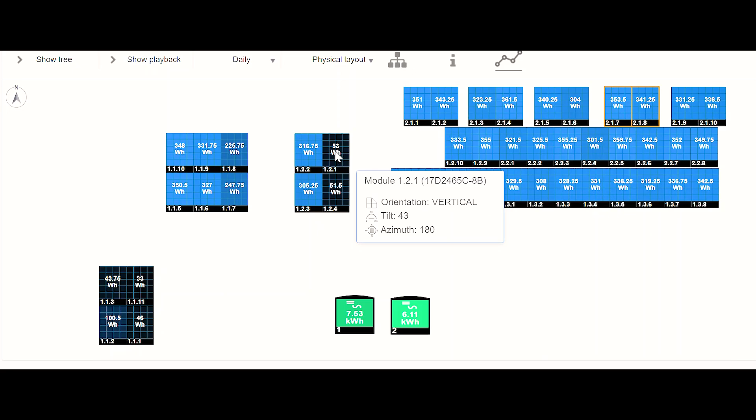The way my solar panels were stacked with the inverter, the production will still be maximized. These ones that are west-facing and will produce lower during the day are stacked over some other ones I'll be showing you when you look at the logical layout. You get what I mean?

So looking at the logical layout, I have 2 inverters. This is the bigger one, inverter 1, with a capacity of 10 kilowatts per hour, while this one has a capacity of 7.5. You can see this one is already at 6.11.

This one isn't stacked too much because all the solar panels connected to this inverter are all working, all on the highest part of the roof, so they're working well. To minimize the impact of clipping, the stacking ratio here is lower, so you can see it's at 6.11, whereas this one has more panels.

This has 3 strings: string 1.1, string 1.2, string 1.3. It has more capacity, but you can see the 6 modules that are producing less - 1, 2, 3, 4, 5, 6. They're all stacked on strings 1 and 2 because they don't produce as much in the morning, so we can still maximize the conversion rate with the inverter.

So as the sun gets higher in the day, these ones will pick up more, and later in the day when the sun is about to set, you'll still be able to have a better bell curve. So the ones that don't produce as much throughout are stacked on this bigger one. This means I'm able to get up to that 10 kilowatt hour conversion continuously, because if these ones are already at their max, this group of 6 will still be chasing it until the sun gets to that peak time. And as the sun gets lower in the day in the west, this one will be producing at their maximum, because these are west-facing.

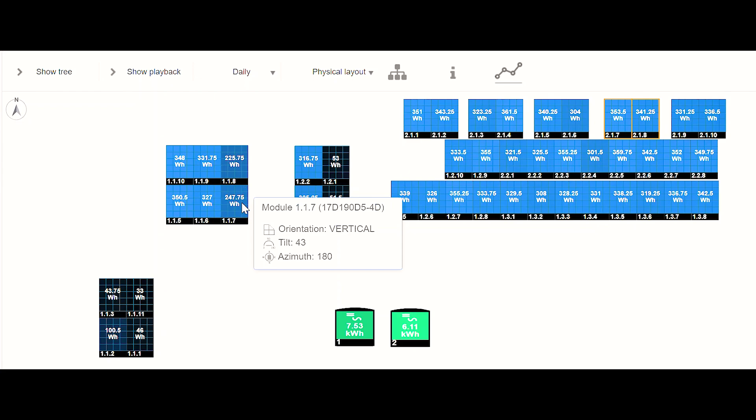I'll go back and show you what this looks like in the physical layout, so you can see the shading - it's a very thorough calculation. Let me go to the weekly generation page and refresh it so you see what it comes up with. The page is loading - I'm showing the load so you see how it's working. You can see the system is loading the weekly generation.

So I still like that I have this still generating for me. And if you calculate that this is lower production, you see that the stacking is less than the 1.26 that it looks like on paper. This is the 12 o'clock recording.

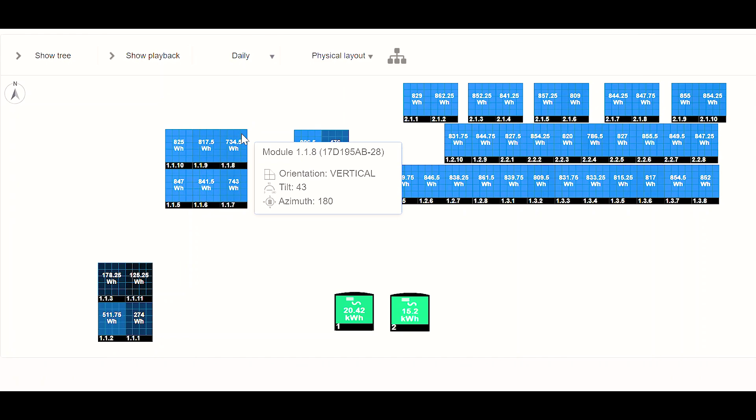You can see that the shading on this panel 1.1.8 and 1.1.7 is already coming off. This is still a little shaded. This is still the west facing portion. It's already increased, but it's not really picking up a lot today. It's a cloudy day as well, so just showing you what it looks like.

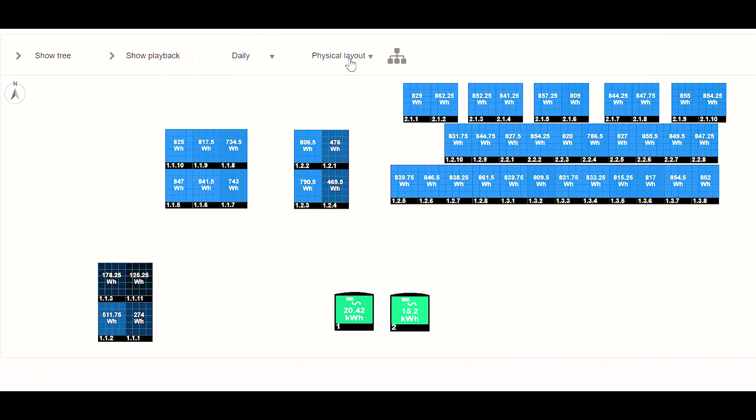And going to the logical layout as well, you can see that inverter 1 has converted 20.42 kilowatt hour today, while inverter 2 has 15.2 kilowatt.

Okay, so here is the main dashboard. The current power right now is 9.62. The energy already generated today as at 12 o'clock is 35.61 kilowatt. Energy generated this month so far is 2.6 megawatt, that's 2,600, and the lifetime is 20.39 megawatt.

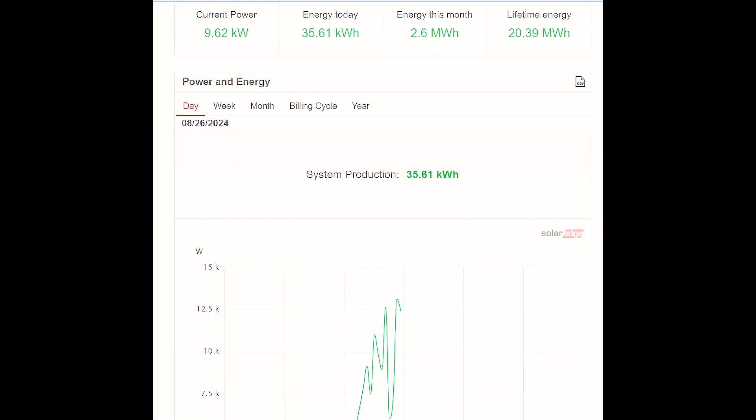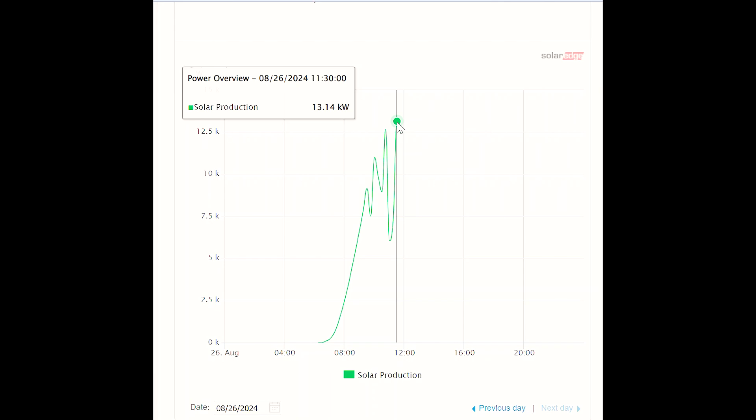So if you're looking at the chart for today, it's a cloudy day. You can see the bell curve is not really doing very well. There's peak and drops. So the max power for the inverter so far at 11:30, as you can see, is 13.14. So it has the capacity to have 17.6.

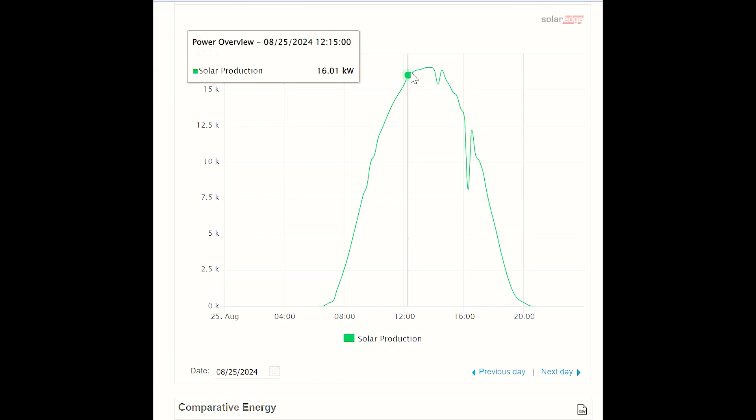If you want to look at the previous day, it can show you the data for the previous day. The bell curve yesterday, the 25th, as you can see, the peak power was 16.5, so no clipping at all. 17.6 is our capacity, and this is August.

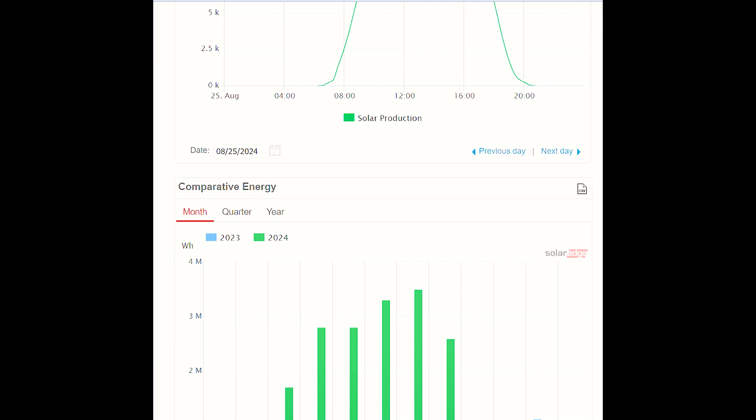It was a few days in October, and then this is November, we got 1.1, and December 0.82. So that's my production so far. By let's say 27th of October, that will be the first full year with the solar, and I'll be sharing updates. Stay tuned. On this channel, I'll be sharing the production data with you.

Looking at the quarterly production, you can see that quarter 1 was low, quarter 2 is the highest, quarter 3, let's see where it goes. We only have quarter 4 data from last year, but soon we'll have comparison data.

So this year so far, out of the total 20 plus megawatt lifetime, 18 has been the 8 months of this year, and last year we only got 2 megawatt in 2023. So if you look at the weekly data, we'll just be showing the peak power.

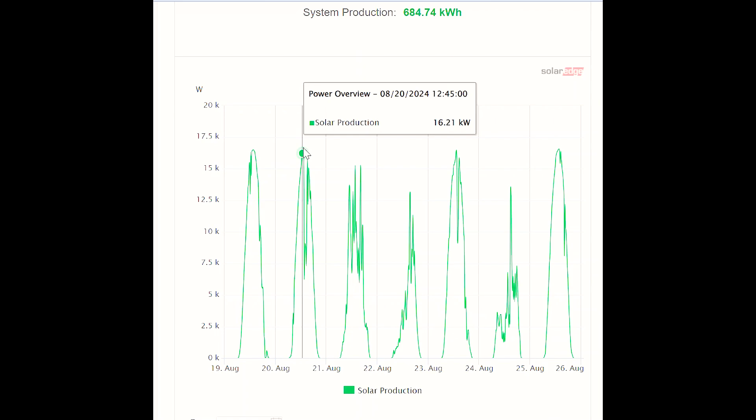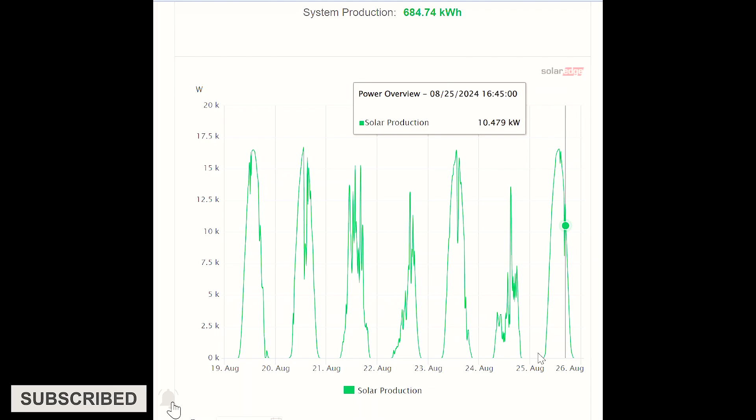So the peak here is 16.4, the peak here is 16 point something, so it's 13 here, like this was a rainy day. The peak here is 15.685, peak is 16.3. So that's been the week so far.

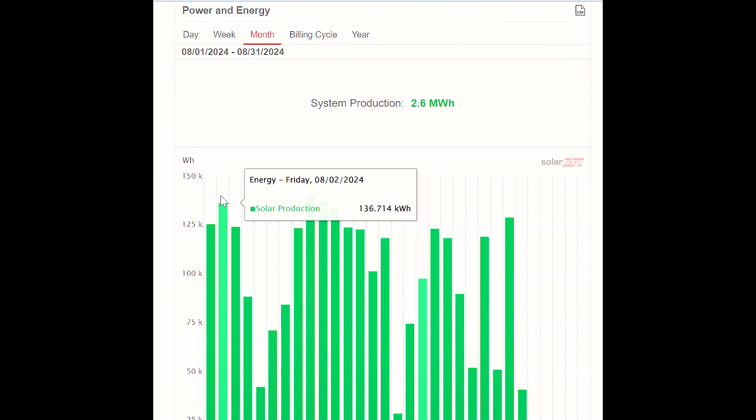So if I go to the month, just to check what the peak power is. The month is shown in a bar chart, just showing the production amount. So the highest so far this month for daily production in August is 140 kilowatt in a day.

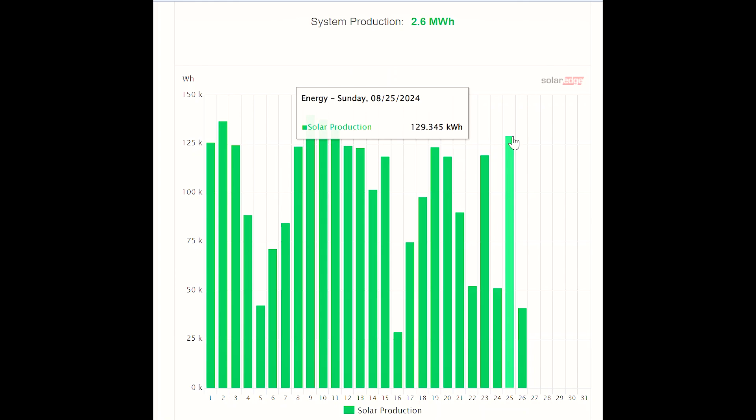There have been 136 days, 137 and 129. So the highest production was 140. This is the data for July 2024.

The highest production in July is 150.7. So that's the highest, you can look at the line, the 150 line. Only this day, the 12th, nearly met it at 148. But those are the two peak days for the month of July.

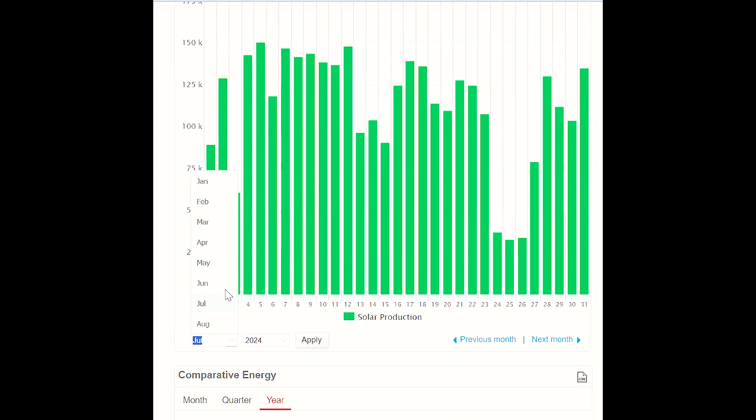So if you go to the month of June, interesting, looking at the month of June, I have 157 days, which is the 5th of June. So there are 3 days that I really got the highest production.

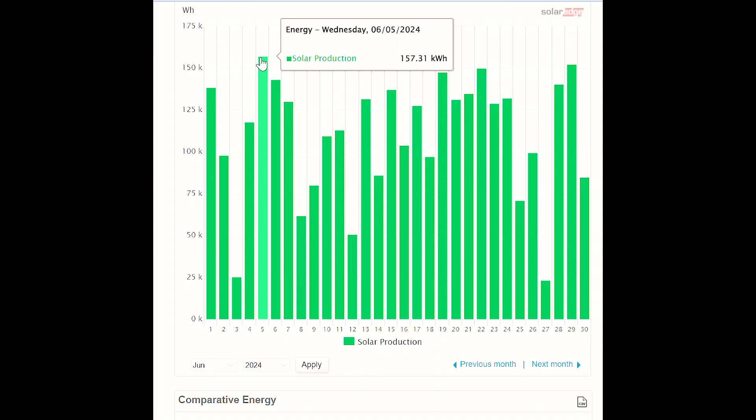I think this is the best day so far production-wise on my solar system, where the system generated 157.31. So if we look at the bell curve for that day, you can see the peak power was 17.58 kilowatt.

So the max capacity is 17.6. I really love what my inverters are doing, the way it's stacked. It's excellent work, no clipping whatsoever.

I just wanted to share, there's 10,000 watt capacity on inverter 1 and 7,600 watt capacity on inverter 2. That means the two inverters can be converting 17.6 kilowatt of electricity from direct current to alternating current per time. Anything more than that is going to clip. Clipping means cutting off, meaning it's too much, it's wasted power.

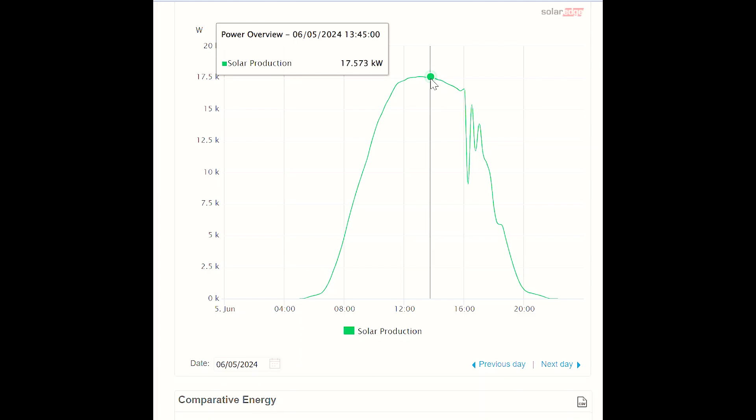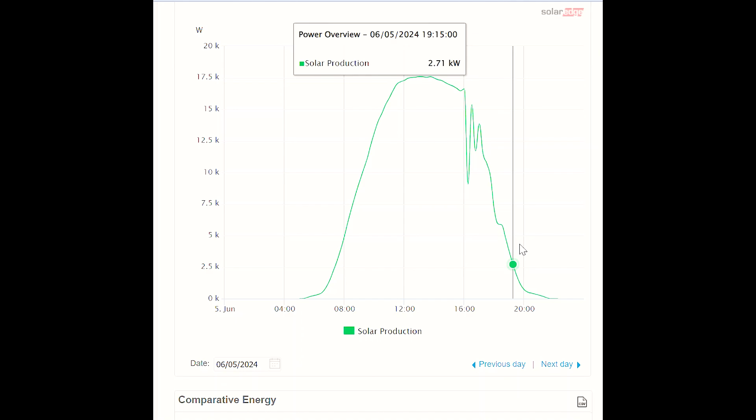But you can see the best day so far didn't reach that 17.6. That means it's really working to capacity. I think there was shading and stuff here, maybe the sun had some cloud cover. Whenever it's not perfect like that, you see something happening, but then it picks up. So this is the best day so far, and there's no clipping.

So solar systems, if not sized properly, there would be clipping. I'm just sharing this so you understand how this works.

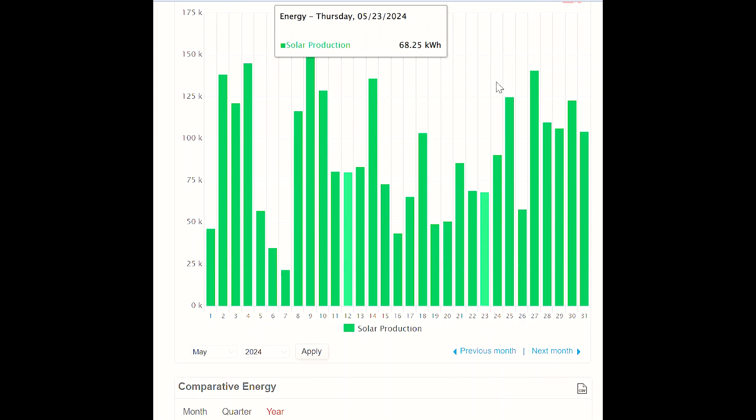So we'll go back to the monthly data and check the month of May 2024. For May 2024, you can see I have this day at 150. That's the highest production day for that month. This one is 140, that's good.

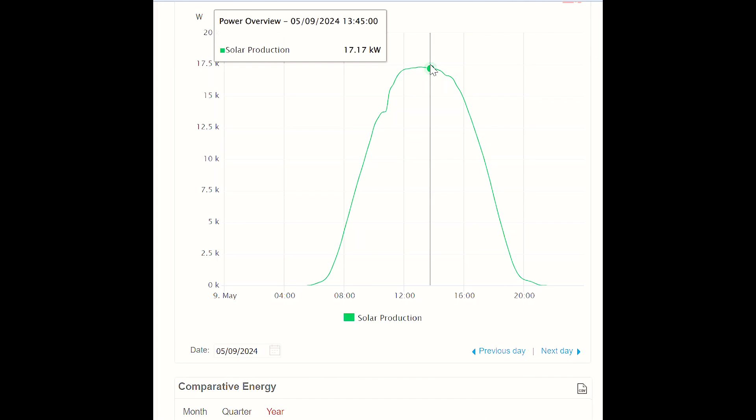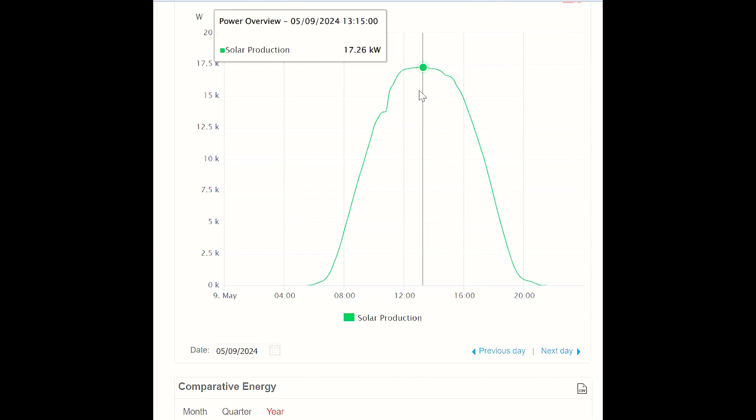If you check the daily data for that day, it has a beautiful bell curve, and you can see I didn't get to the point of clipping. You can see 17.17, 17.26, just about 1 o'clock, 1:30, that's when the peak generation is. The bell curve here looks much better for the 150 generation day in May.

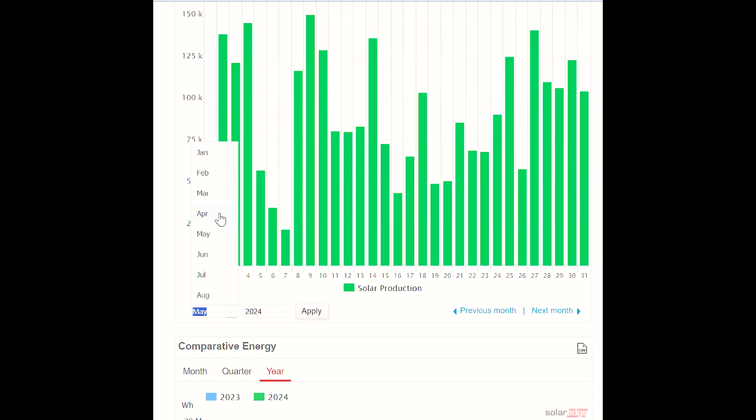So we'll go check the April production data. You can see one of the best days is 147 in April. We have 145 days, but there wasn't really any day that reached 150 here.

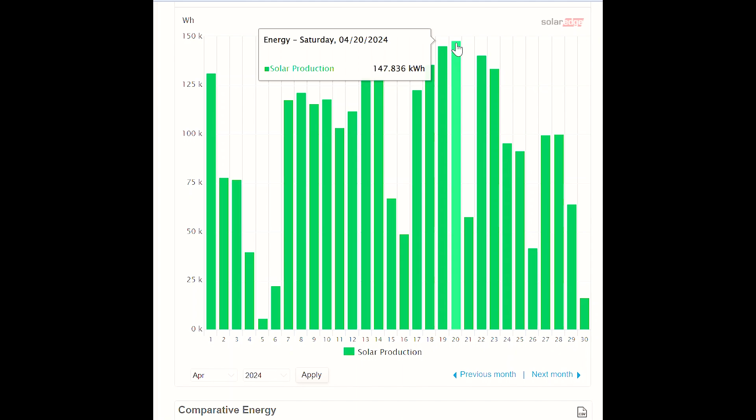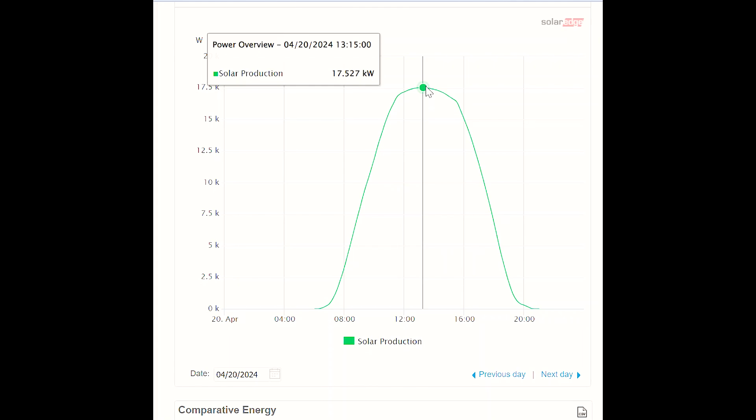If you click on the 147 production, this is a beautiful bell curve this month, and you can see 1:15 - same thing, around 1:30 is when I get to peak power based on how the system is set up here, and you can see it hovering around 17.5. It didn't reach that 17.6 to get to the point of clipping.

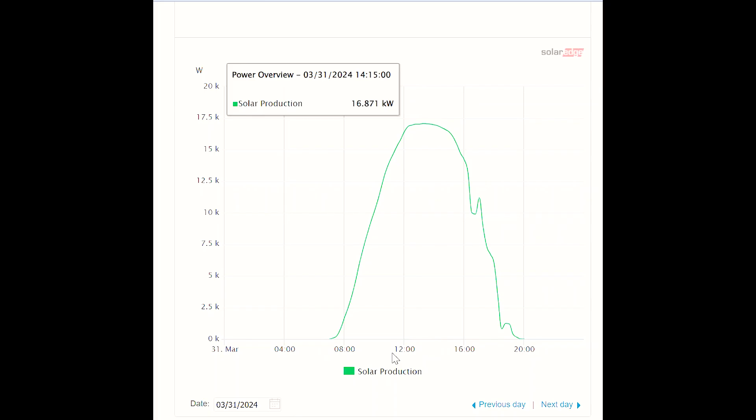Let's click on that March 31. Look at the bell curve, also looks pretty good. If you look at the February production, there were still some decent days.

Some days were totally no production. For people wondering, could there be days with no production? Look at this, February 5th, it's 0.16 kilowatt. On the 6th of February, 0.265, 0.277, 0.007. These were the days the snow was pouring non-stop, really dark days, like non-stop snowfall, the cloud wasn't even shifting. It was really dark days.

So whenever there's no sun, it doesn't work. But whenever the snow is not falling, on days that snow is not falling, you have days where there's snow on the roof, snow on the floor everywhere, and the solar still produces. These are the snow days. As you can see, the snow is falling, everywhere is dark. But when the snow stops, this is February 16, 17, 18, 19, you can see the beautiful solar production.

I don't clear snow from my roof. It's still working. As long as the sun is out, it doesn't matter what time of the year. This is still a very decent production of 91 kilowatt hour. This is 92 kilowatt hour. This is 91 kilowatt hour. The solar is working beautifully.

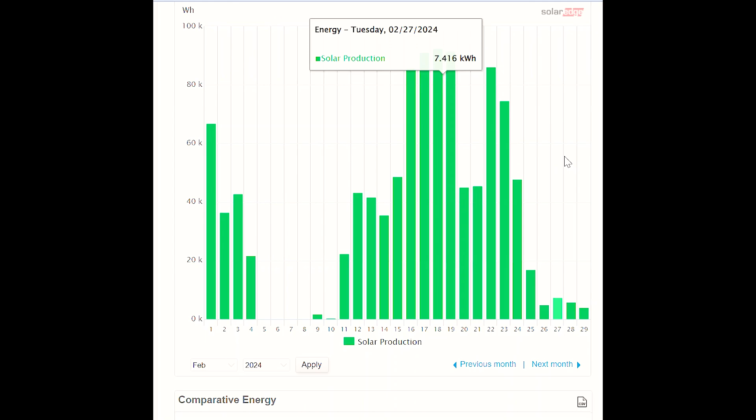You can look at this data and correlate it to the weather. It's amazing. These days as well are kind of dark days, and yet solar still generates. It doesn't matter what the weather is, it still produces a decent amount, like 1 megawatt for February.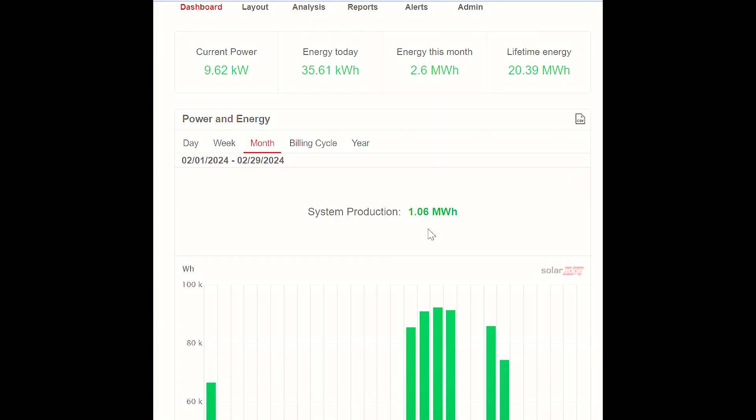That's amazing. If you watch my video on how net metering works, you realize all this excess generation I don't need in summer, I send it to the grid and get credits, which I use to cover days like this in February or days like that in December.

I'll be sharing January as well, so you can have a look at that. January is one of the most snowy days, and you can see we still have days of 52. This is one of the darkest months.

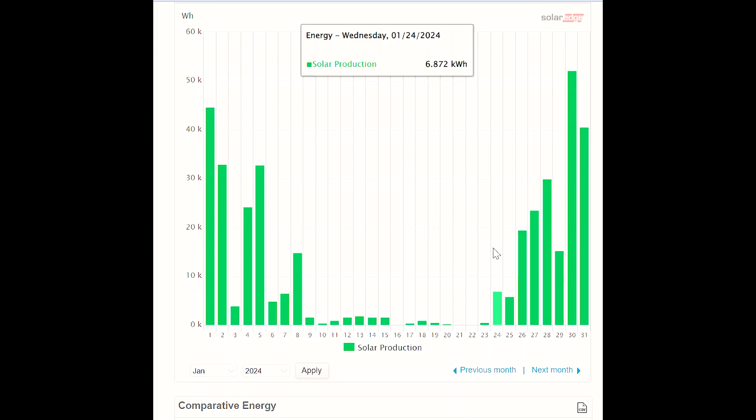So when the sun doesn't really come out at all and the cloud is really bad, that's when you don't get any production. But as long as the sun comes out, if the snow kind of takes a break, you get the solar working even with the snow on it.

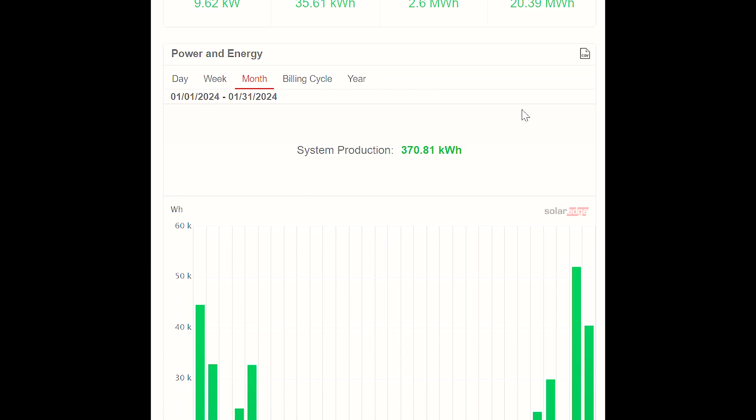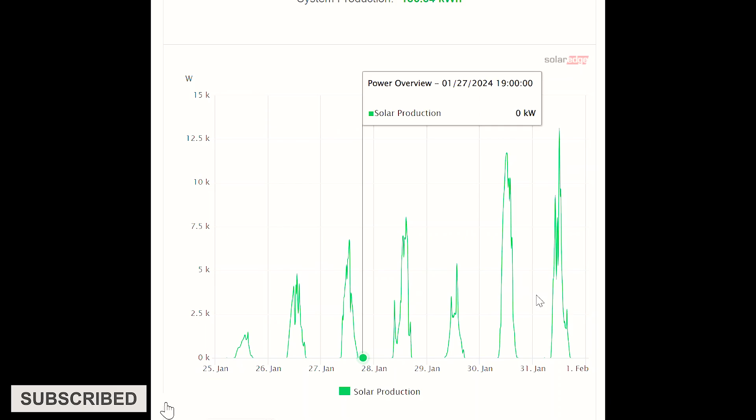We've reviewed the dashboard tab. I've shown you what it's showing there, the production, the daily production. This is where I check the curves for the day. You can see this is where you get the weekly production. It still shows the general bell curve, usually corresponding with whatever the prevailing weather condition is. The monthly one is a bar chart that compares.

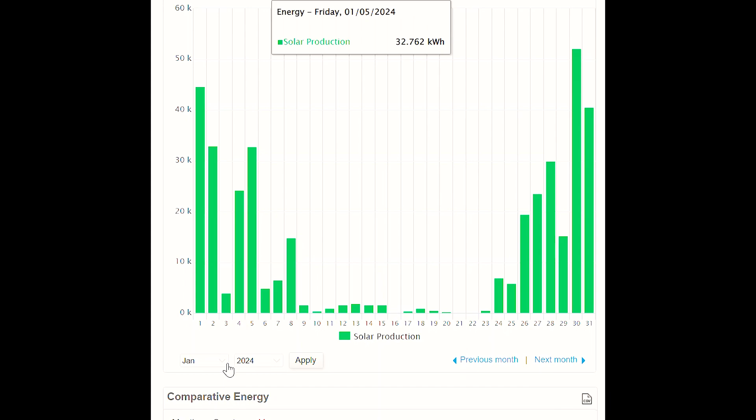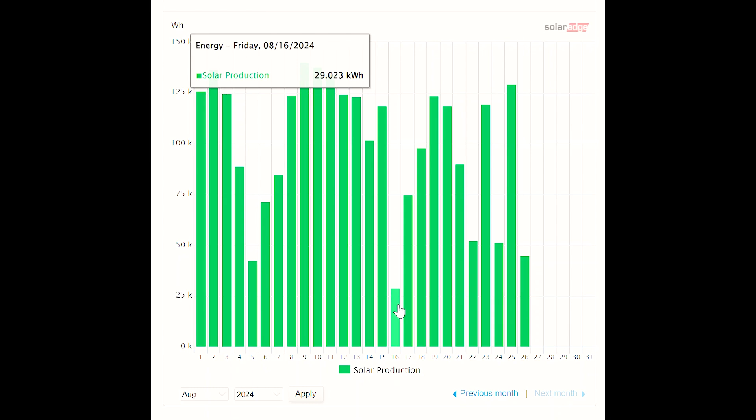This is the January one I was talking about. So if I go to August, you can see my chart so far in August. You can see this day only produced 29, it rained all day this day. The weather affects the production, but overall it's been decent production so far, 2.61 megawatt.

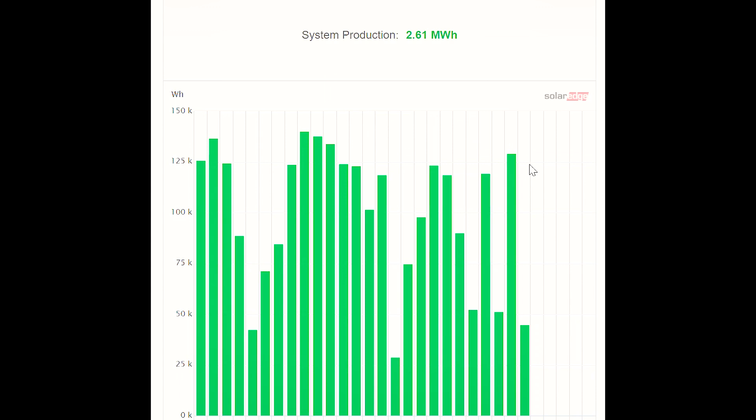And that's everything. This is the yearly production, the quarterly, the monthly. That's all in the dashboard tab. So if I go to layout, we've seen the layout. This is the logical layout, the physical layout.